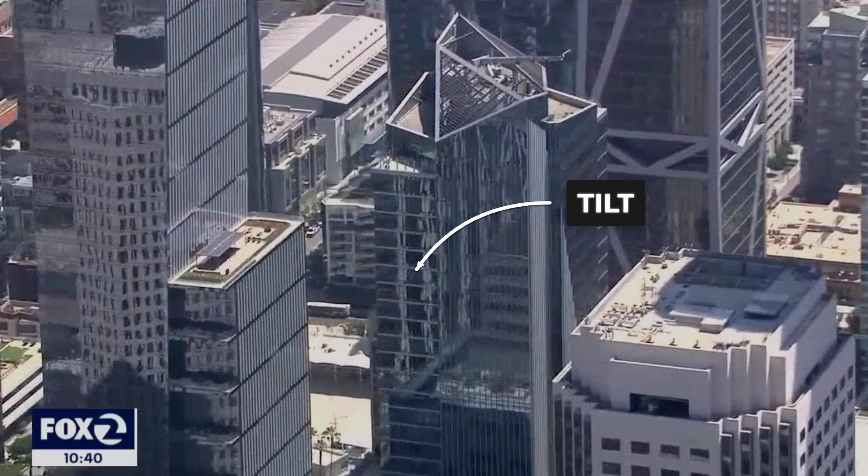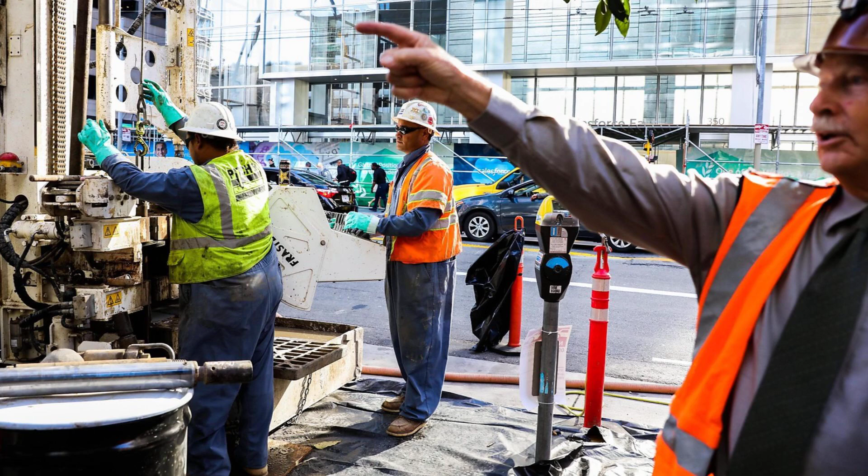But if you know where to stand and look carefully at the roofline against the sky, you can see it. A lean, subtle, deliberate, undeniable. The Millennium Tower has sunk 18 inches into the ground and tilted 14 inches to the northwest. It is moving still. And what makes it singular is this. The people who built it knew exactly why it would happen. They built it anyway. This is the terrible engineering behind San Francisco's sinking skyscraper.

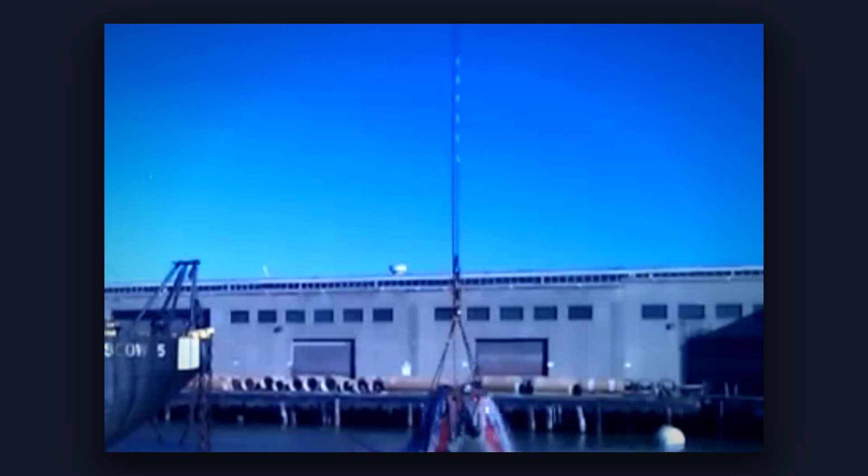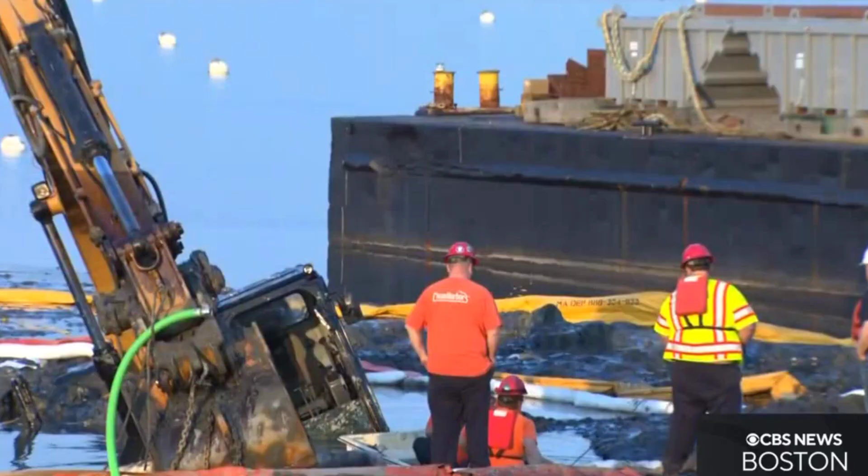Beneath the glass and marble, the ground tells a different story. San Francisco's eastern core sits atop a thick band of bay mud, fine-grained, waterlogged clay that blankets the old shoreline in layers up to 45 meters deep. This is not solid earth, but a living, shifting medium. Its water content is high, its structure loose. When loaded with weight, bay mud compresses and consolidates, squeezing out water over years or decades.

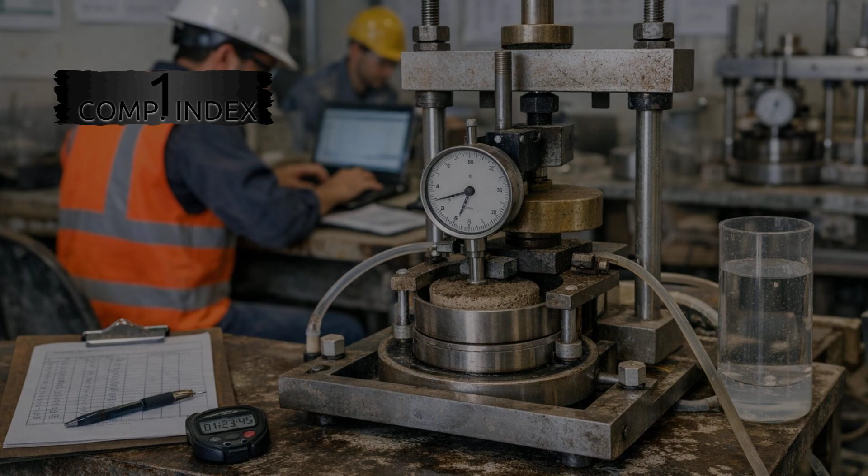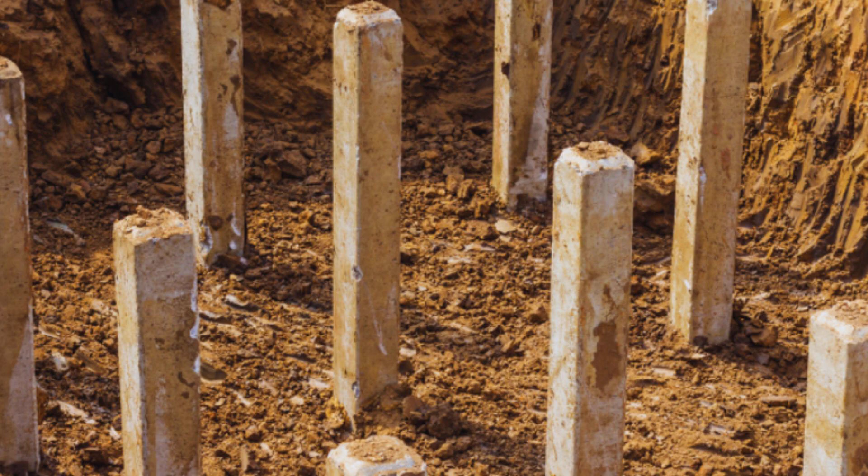The compression index, measured at approximately 0.5, signals a soil primed for settlement, far beyond what any engineer would accept beneath a skyscraper. Effective stress in this mud is low, often just 10 to 30 kilopascals, with undrained shear strength dropping to 5 to 15 kilopascals at depth. Under pressure, the mud yields and settles, unable to hold its shape against the relentless demands of concrete and steel. This is a foundation that remembers every ton placed above it, and it never stops moving.

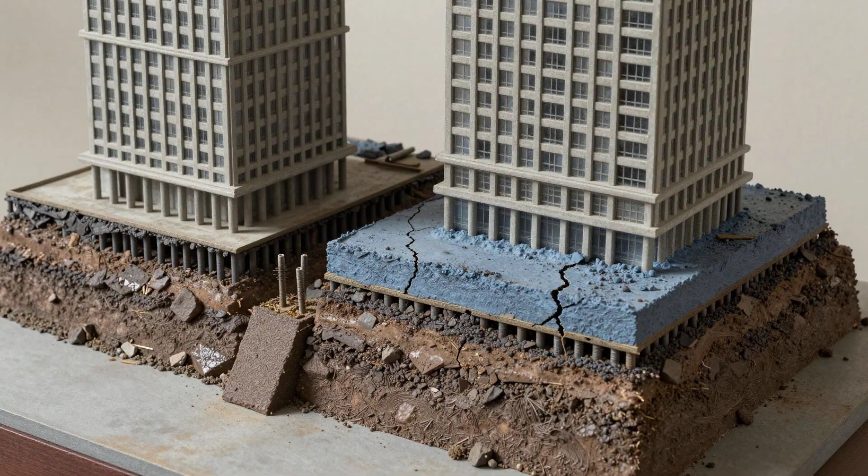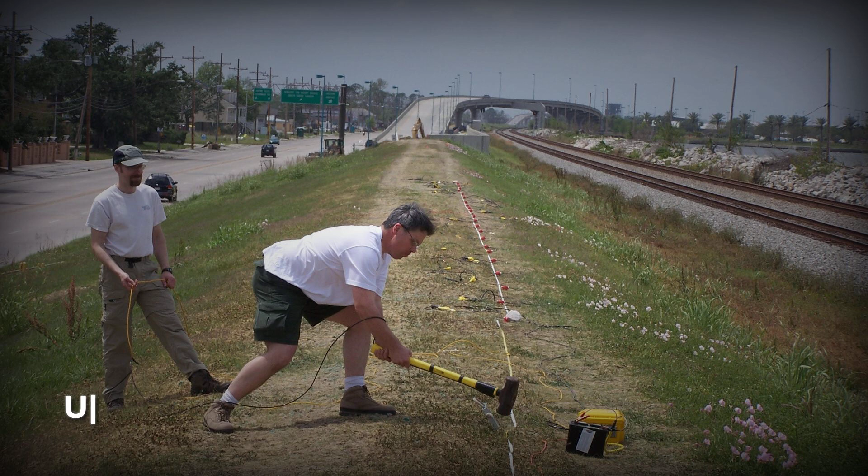The warning signs were written into the city's own history. In 1906, when the ground shook, devastation mapped itself along the soft underbelly of San Francisco. Buildings anchored on bedrock stood firm, while those resting on more than 30 meters of bay mud and fill buckled, twisted, and in many cases collapsed outright. USGS surveys documented how seismic waves multiplied in the mud, amplifying ground motion by a factor of 4 or 5 compared to the Franciscan complex beneath Nob Hill.

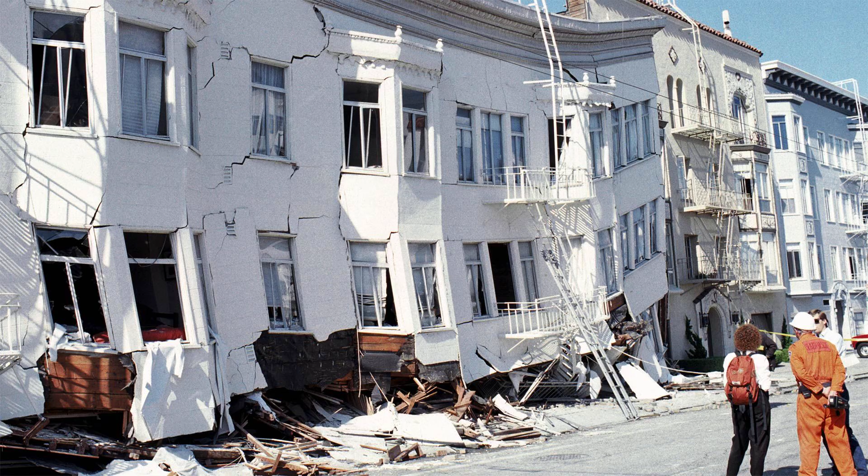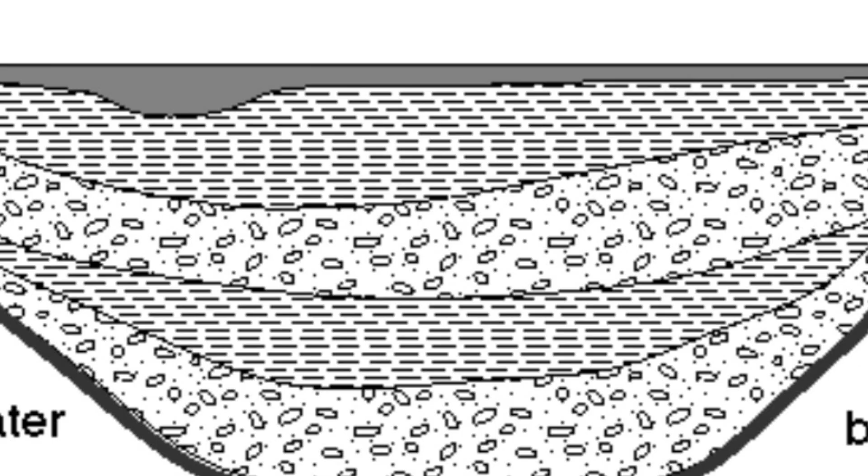The same pattern returned in 1989. Loma Prieta's long-period shaking reactivated old scars. Lateral spreading split streets, and liquefaction ruptured gas lines in Soma and the Marina, where the mud layer ran thickest. Failures clustered precisely where engineers had always known the danger lay, in the deep, saturated sediments along the eastern waterfront. The lesson was unambiguous. The ground beneath the city could not be relied upon to hold its shape when stressed. These disasters were not mysteries. They were forecasts, documented and mapped, waiting for the next ambitious structure to test their patience.

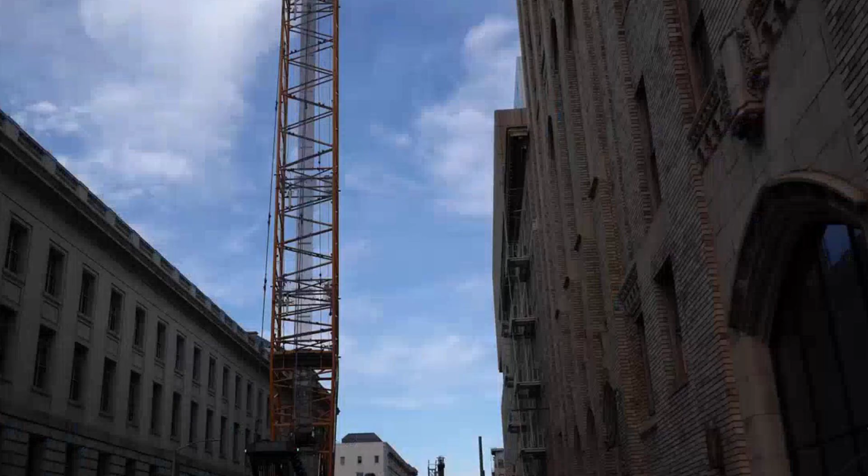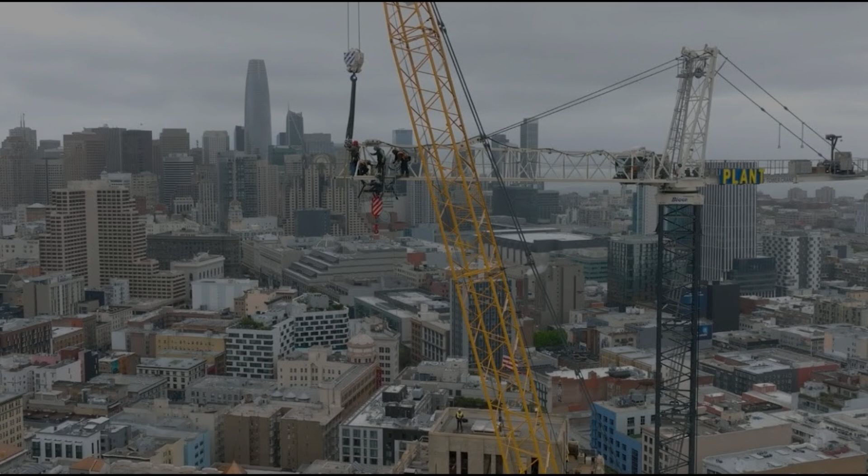In the boardrooms and back offices, the numbers made the argument. On paper, the difference was $58 million, a line item that dwarfed every other variable in the foundation debate. The 58-story Millennium Tower, a symbol of luxury and permanence, would rise not on bedrock but on friction piles, sunk 80 feet into bay mud. The developer's internal spreadsheet, later entered as evidence, laid out the calculus. Friction piles meant a baseline construction cost of $785 million. Anchoring to bedrock would push that total to $843 million. The savings were irresistible, especially with projected sales exceeding $750 million and penthouses priced in the tens of millions.

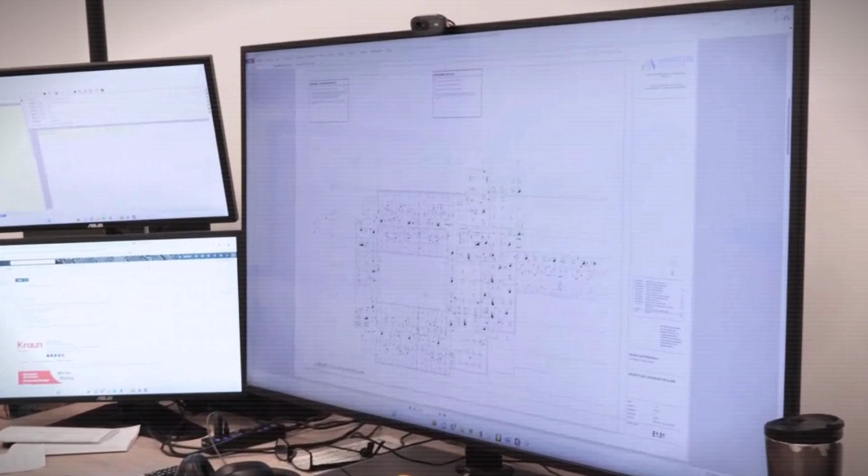Engineers and accountants weighed the risks in memos and cost models, reducing geology to a budget line. The ground, ancient and indifferent, was treated as a negotiable expense. The decision was not an oversight. It was deliberate, justified by a promise that the friction piles would hold. The spreadsheet's cold arithmetic became the foundation's moral fault line.

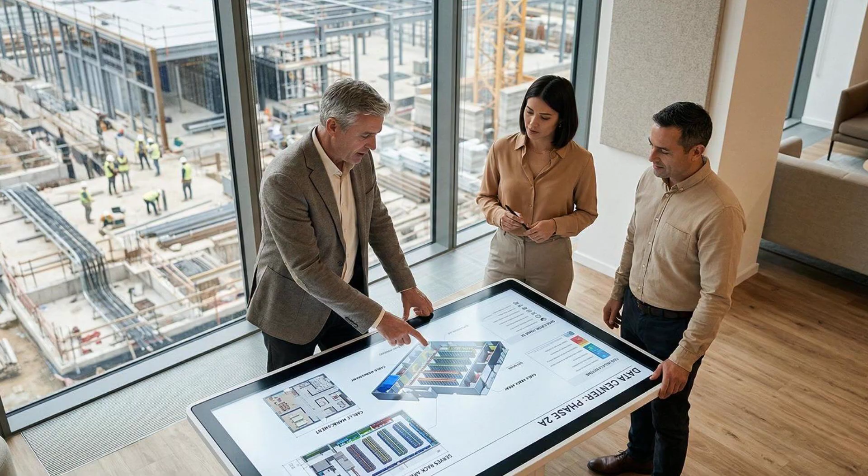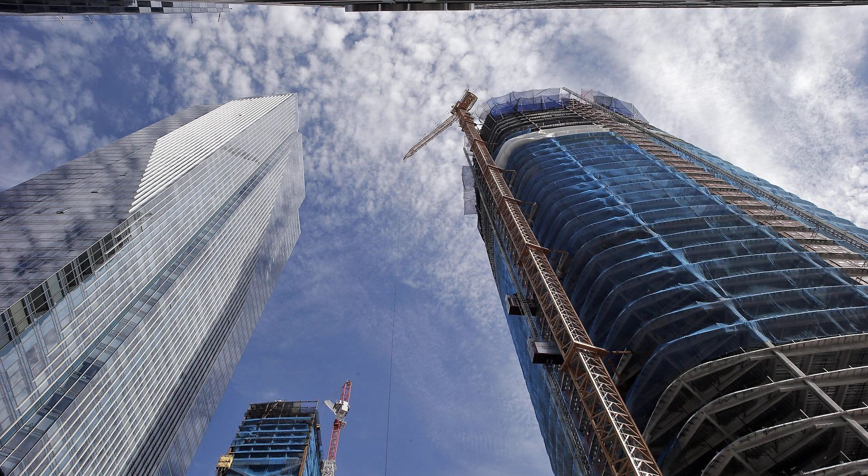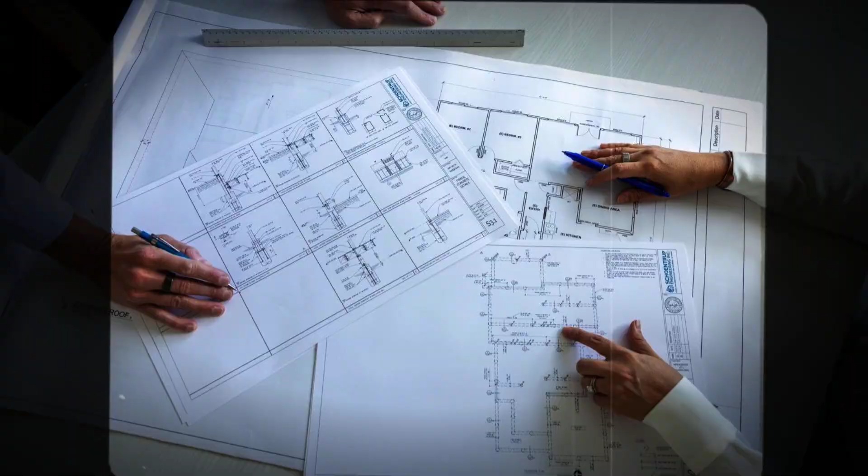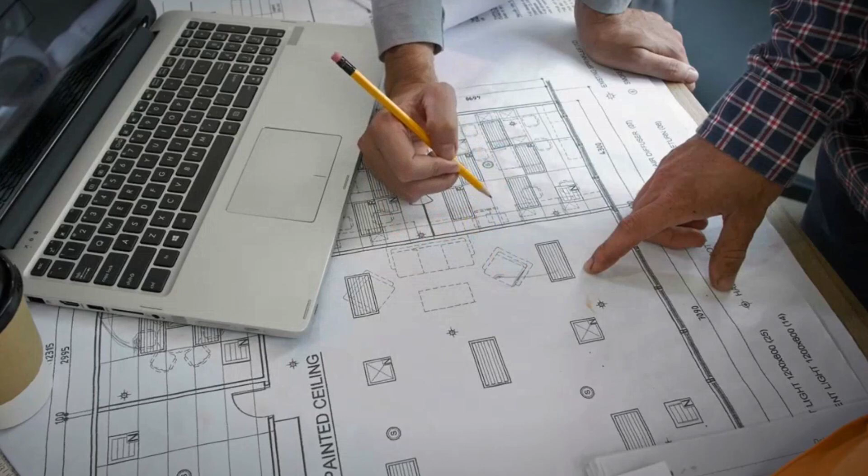The review board, composed of outside engineers, signed off on the friction pile system, concluding that the predicted movement fell within accepted limits for high-rise towers in bay mud. The building opened in 2009, marketed as a permanent addition to the skyline. The permits, the forecasts, and the signatures all converged on a single assumption that the ground would behave as predicted, and that the tower's weight could be negotiated with paperwork and professional consensus.

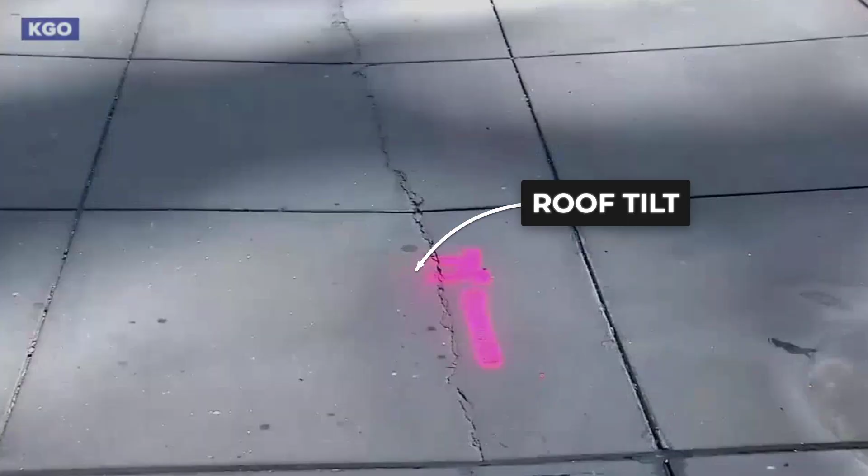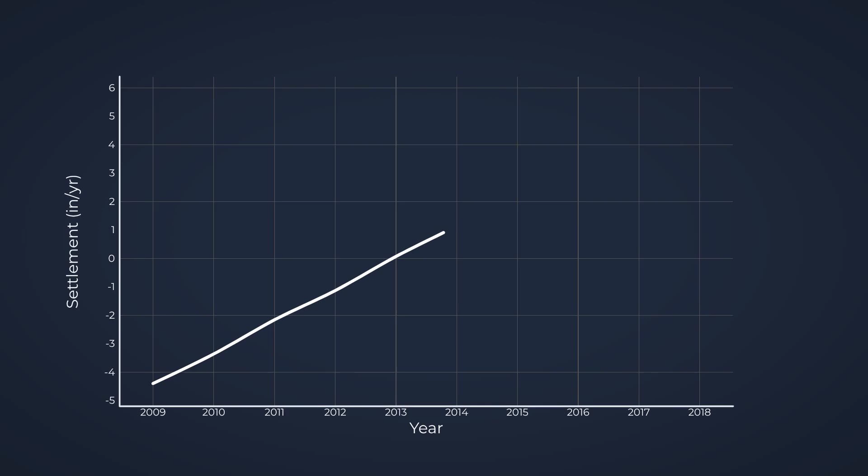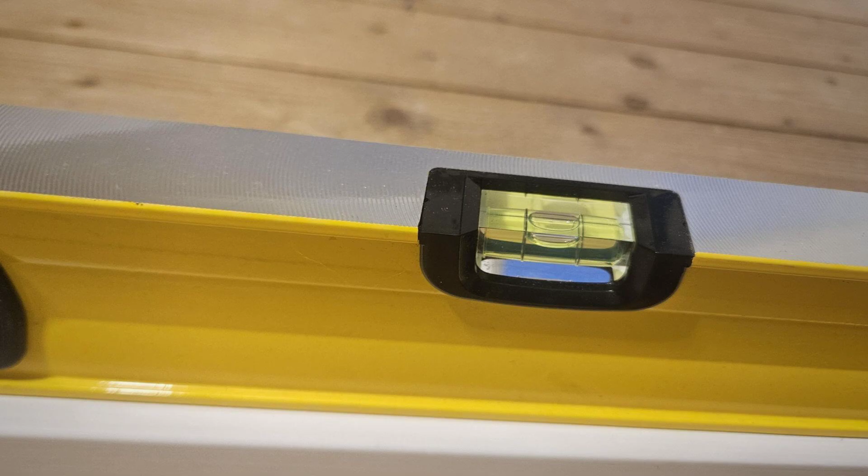Numbers became the building's harshest critics. Monitoring Report 135, released by the city's inspection division, charted a vertical settlement of more than 16 inches, 4 times the design allowance, while tilt readings at the roof reached 14 inches off plumb. The instruments, indifferent to marketing promises or legal arguments, recorded an accelerating descent, with annual settlement rates that doubled after 2015, peaking at over 1 inch per year prior to the retrofit. Each graph, each data point, stripped away the last defense of optimism. The engineering forecast had not merely been exceeded, it was obliterated. The evidence was unambiguous. This was not a mystery, not a hidden flaw, but the measured collapse of confidence in the foundation's promise.

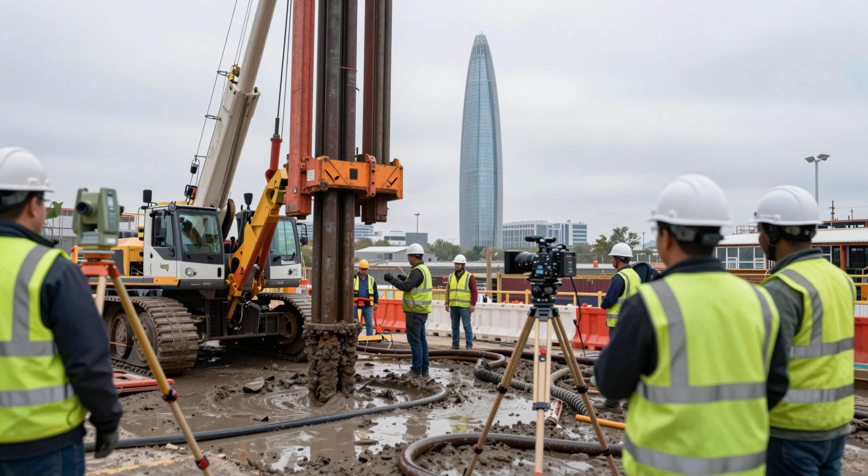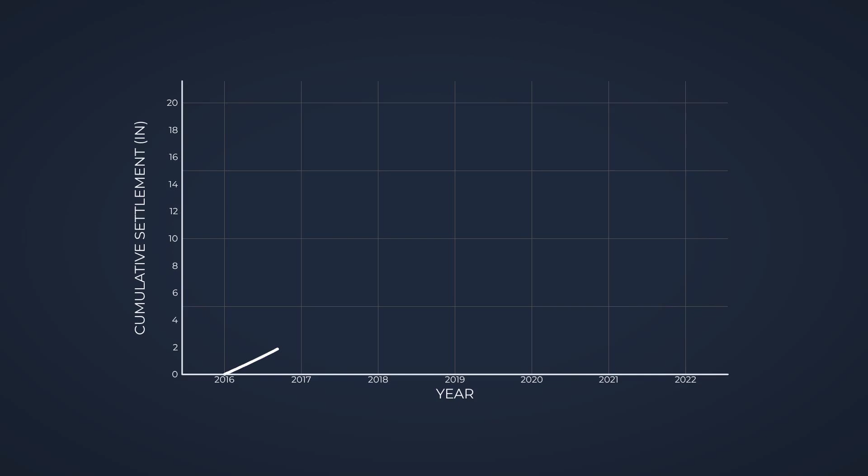The retrofit was supposed to be the rescue. 18 new piles, drilled deep to bedrock, promised to halt the descent. But as the work began, the ground responded with its own verdict. An extra 2 to 3 inches of settlement in a matter of weeks, recorded by the city's monitoring reports. Sales listings multiplied as confidence evaporated. Unsold units lingered, prices dropped by up to a quarter, and penthouses once listed at $8 million sat vacant.

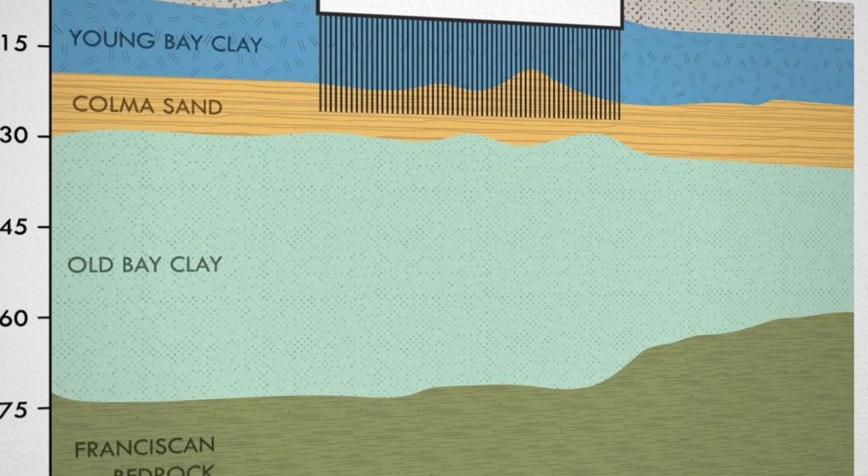Policy advocates seized on the fallout, pushing for mandatory bedrock anchoring and public disclosure of real-time settlement data for all future high-rise permits. The ground, unmoved by lawsuits or market optimism, forced the city to reckon with what had been ignored. Geology is not a line item to be negotiated. The Millennium Tower would not collapse, but its slow motion descent became a caution written in concrete and mud. Gravity doesn't negotiate. 58 stories, $750 million in sales, and $58 million saved. Yet the ground keeps sinking. The Millennium Tower won't collapse. Its failure is slower, more permanent, and entirely chosen.